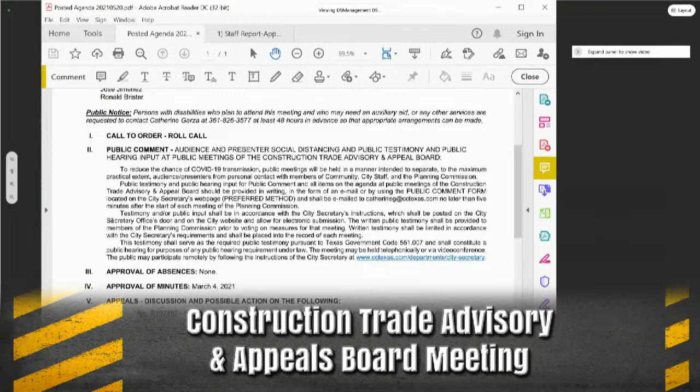Okay, here's the agenda. We have no public comment right now. I'm going to open public comment. If there's nobody, I'm going to close public comment. There's no approval absences. I'm going to open up item number 4, approval of minutes.

Has everyone gotten a chance to review the minutes? If so, I need a first and a second for approval. Mike Wanzer, I make a motion we approve the minutes as written. Gary Camp, I'll second it. All in favor? Aye. Aye. Aye.

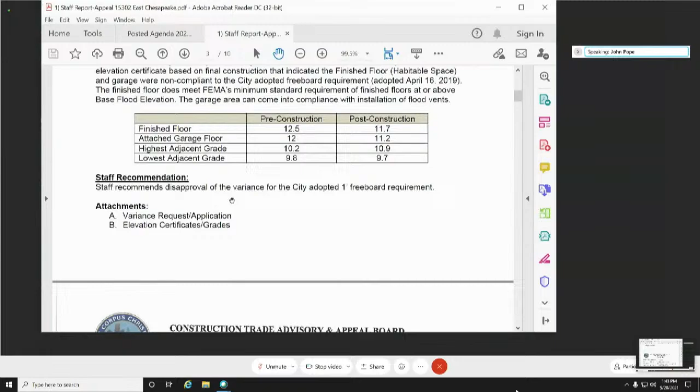And doing all that we could to raise the house. If you deny the ability to obtain a certificate of occupancy, what then? Does that mean we just have to tear down the house, render it unlivable, and rebuild it? I just feel like that's a little extreme.

I think some grace should be given, especially under the circumstances that this exact same builder built one at the exact same time, right across the street, and was granted a variance. So I'm just surprised to hear that the first comment from this committee was to deny it. That's just kind of unfathomable.

Mike Wanzer here. It's not the committee speaking, it's me speaking as a member of the committee, so it's not the whole committee speaking. May I ask why that is your opinion? Sure, you can ask, and I'd be glad to explain.

Mike, you have to wait for this. Oh, you have to wait for. Yeah, let's just wait, let's follow protocol. He asked me a question. He is, but we need to wait until he's done with all his conversations, and then we can close and speak as a group.

Very good, okay, yep. Anything else, John? No, I'm done. Okay, all right. I'm going to go ahead and close public comment and open the discussion to the board members.

So here you guys can bring up questions towards the owner, or you can bring a question towards the building committee, which would be ourselves, or towards Luke Fry or Kathleen. So if you guys have questions or comments, you can speak as a general group.

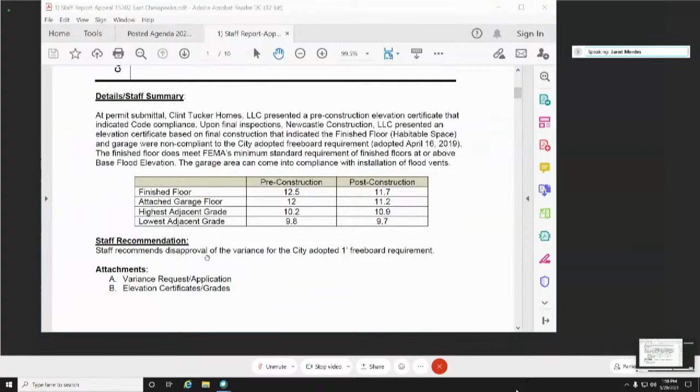Ram, one of the concerns we had - and anyone can go back and listen to the recording of the last meeting - but when you allow a variance that is below a city standard, the message that's sent is, well, what about me? And unfortunately today we're hearing that from the public. Mr. Pope basically says, hey, you gave it to him, so I expect you to give it to me. And in a sense, I didn't think it was going to be a problem because y'all are lenient. And in all honesty, I know I'm speaking out of turn, but I think you should know that Mr. Clint Tucker, we contacted him after we found out about this, and he literally mocked this committee. And so to me, the big problem is these contractors.

I'm not a contractor. I hired out someone who I thought was a professional who proved to not be that. But the contractors are not being held responsible. Why Clint Tucker didn't get a fine for two homes having an inappropriate foundation is beyond me. And why he's still out in our community building five or six homes at this very moment is frightening to me as a consumer.

So we appreciate that comment. This is Mike Wanzer - on that comment, for the same reason that you don't understand why he's still doing that, I don't understand why you don't have him in court instead of in front of us. Why you're not taking civil action against him instead of turning to the citizens of the community for relief.

Well, have you ever gone to court? Do you have $100,000? I don't have $100,000 extra to take him to court, in all honesty. So I'm trying to make it by, I'm trying to deal with what I have, and I don't have the financial means to be able to take that man to court. And if you've had any type of legal action, you can have empathy and understand that sometimes you financially just can't float things like that. And I cannot - we understand your predicament. Thank you. So I'm empathetic, but it doesn't change the fact that it's not in compliance. Thank you, Mike. Thank you.

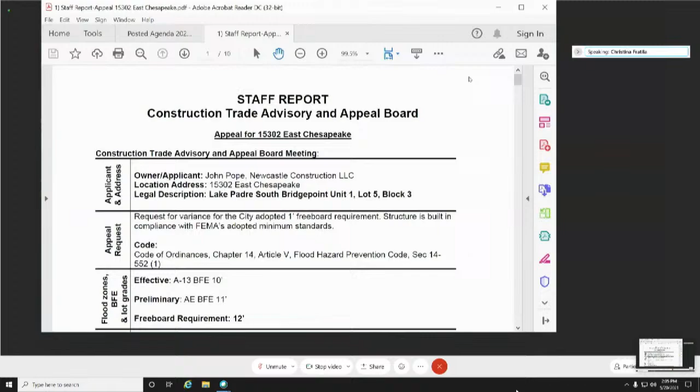Thank you very much for your approval. Yes, ma'am. And if you do choose to open a case against Clint Tucker, please feel free to reach out to me, I'll be happy to give a statement and lots of information because it's a big public concern what he's doing. Yes, ma'am. If you feel like you want to open civil litigation, you're more than welcome to use our findings here. Well, thank you.

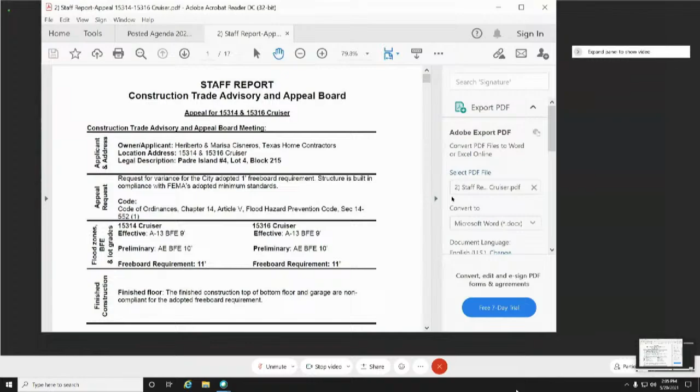Thank you, I'm going to go to the second appeal. I'm gonna go ahead and give me a moment to bring it up, please. Just a moment, no problem. Okay, let me know if you see it. It's on there, we can see it. Okay, great.

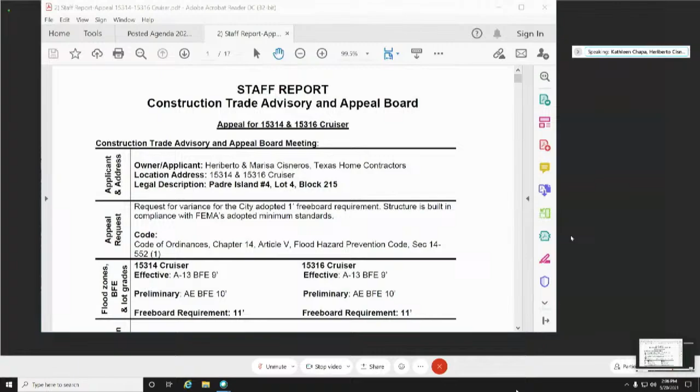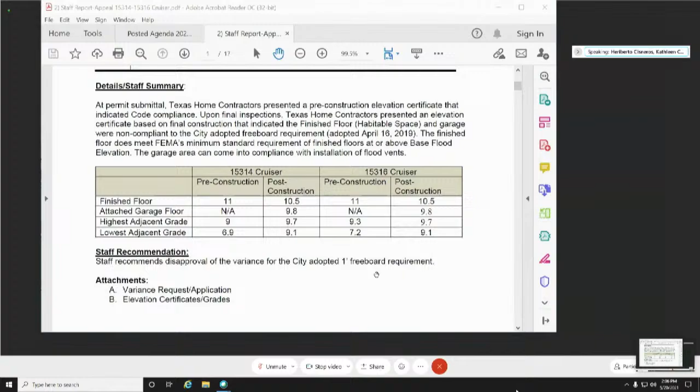Okay, thank you everyone. For the second appeal, we are looking at 15314 and 15316 Cruiser. It is a townhome located at Padre Island number 4, lot 4, block 215. At permit submittal, Texas Home Contractors presented a pre-construction elevation certificate and indicated code compliance. Under final inspections, completed 4/13/21 for both addresses and approved, it indicated that the finished floor was below the city adopted freeboard requirement. 15314 is sitting at 10.5, required pre-construction is 11. 15316 Cruiser is at 10.5, pre-construction at 11. Staff recommendation is disapproval for the variance for the city adopted 1-foot freeboard. Attached, you're going to see the variance request application, the elevation certificates, which include the grades. And I believe we have the representatives online to discuss it.

Yes, we're here. I'm gonna go ahead and open public comment. Yes, sir, can you please state your name? Heriberto Cisneros. Marisa Cisneros. Okay, thank you.

Do you guys have any comments to make? Well, I'm the homeowner of these townhomes on the island, and the property is already, we closed before we got the CO. And when we tried to get my last inspection, we found out we're like 5-7 inches below the elevation certificate from the beginning. I mean, we didn't really know about it. When we poured the concrete, everything was okay from my concrete guy, but honestly, we don't know much about benchmarks and all that.

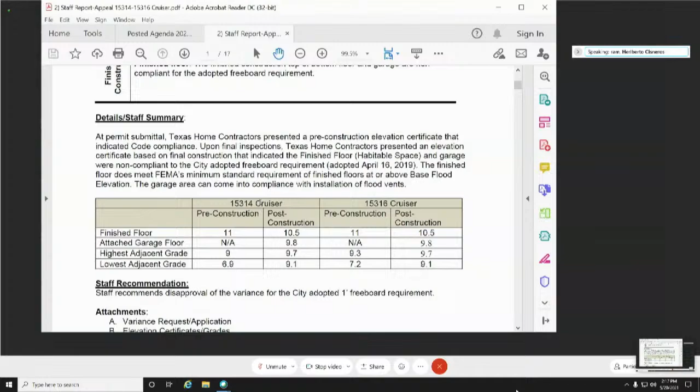Okay, go ahead and close up item 2. We're going to open up item number 3. Thank you very much. Thank you, guys.

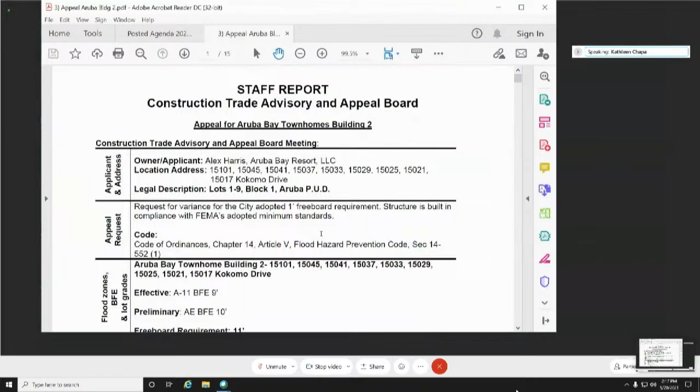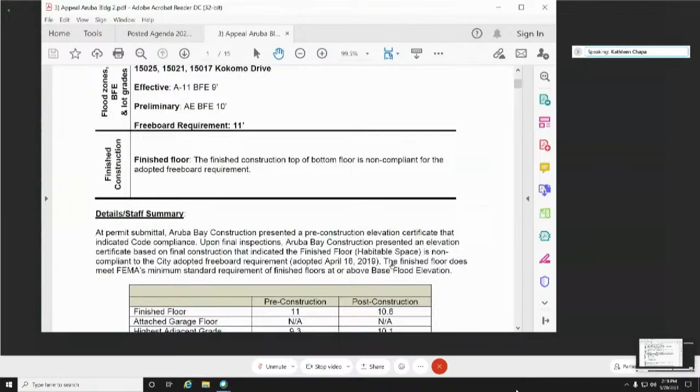Okay, Aruba Bay Townhomes building number 2. There are a few buildings on this site, with 3 different elevations for the site, I believe. And this is the only building that fell a little short. At permit submittal, Aruba Bay Construction presented a pre-construction elevation certificate indicating compliance, with finished floor at 11. Upon final inspections, approved on 4/26/21, it showed 10.6 at finished construction for finished floor, and it does not meet the requirement of 1 foot extra for freeboard that was adopted April 16th of 2019.

It is the staff recommendation for disapproval of the variance due to the city adopted 1-foot freeboard requirement. Below you'll see a variance request application, the elevation certificates with the grades, and we have representatives online today to discuss that. Okay, I'm going to open it up for public comment.

Does the applicant have anything to add? Okay, sorry, I didn't unmute. Good afternoon, this is Alex Harris with the Aruba Bay Resort.

I have with me Craig Kerr and Adriana Carter, our construction team on this property. I hope you can see this — this is a site located out on Padre Island at Aruba and Leeward. The building we're talking about, I've circled, is a 9-unit complex on Kokomo Drive.

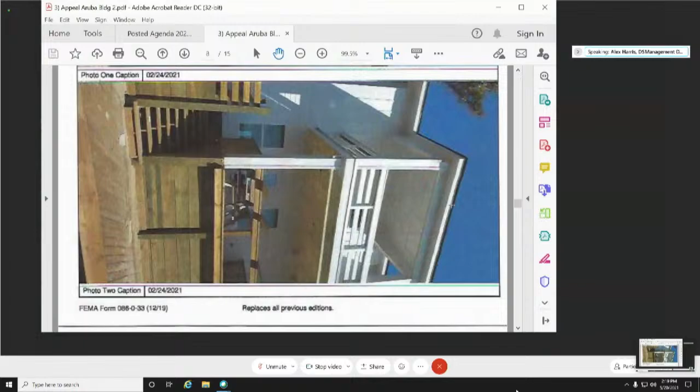When it was built, we thought, from the contractor — and again, we are the contractor, but we do the best we can with the group that we have out there — that it was at the required elevation of 11 feet. Getting ready to finish...

We asked for the final elevation certificates and found out it's 10.6, about 4 inches low. However, this is tied in with a 72-unit project across the street. As was mentioned a minute ago, this site is a little complicated in that it's got 3 different elevations running through it — we have 8, 9, and 10 — and we were working off of a benchmark that we thought would let us appropriately know the elevation on each building.

Each one — we've got buildings 1, 2, 3, and 4 right now. It's our interpretation that this is the only one that has a little bit of an issue. We've built over 500 townhomes on Padre Island and Port Aransas. This is our only one in the last 15 years that did not match up with the proper elevation. We apologize. We wish it hadn't happened.

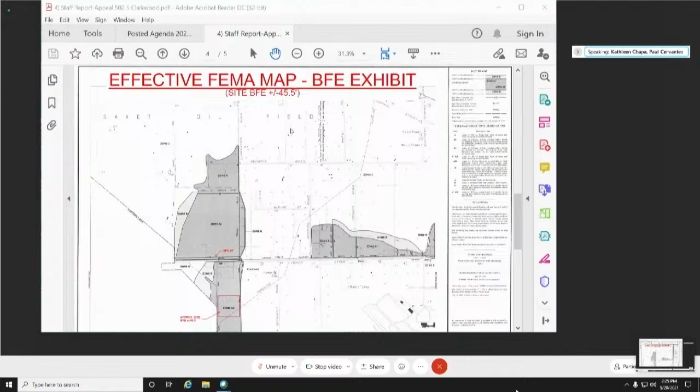We do have a couple of representatives on the line for this site. Thank you, I'm going to go ahead and open it up to the client for comment.

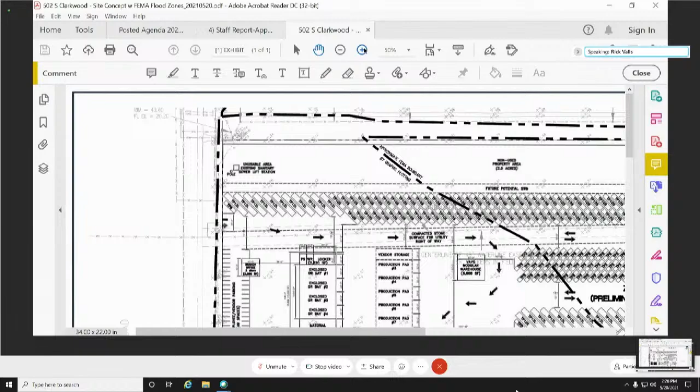Hi, this is Lawrence Valls. Hi Kathleen, and Chairman Munoz and committee. I have with me Rick Valls as well, and I think Michael York is on the line as well. We're asking for your consideration for a variance of the BFE requirement for this 30-acre site. It's a 27-acre project we've been working on for over a year. We've jumped through quite a bit of hoops in zoning and working with the pipelines that are there and being in the AICUZ zone. So we do have some height restrictions we're working through as well. But the project is an interesting one. It's primarily a laydown yard, but it will have a 16,000 square foot pre-engineered metal building requirement.

Our request is related to the effective FEMA maps versus the preliminary FEMA maps that we understand are not yet adopted. We believe the preliminary FEMA maps are more reflective of the actual flood risk in that area. Clarkwood Road is at about a height of 43 feet adjacent to our property, and most of the property is about 41.5 to 42 feet. The BFE from the old maps is listed at 45.5 feet, which would require us to go a foot above that to 46.5 for any habitable structures. We plan to locate them close to the road, which would require about a 5-foot differential from the existing grade, putting us 3 feet above street level. That's going to be very difficult for ingress and egress for us.

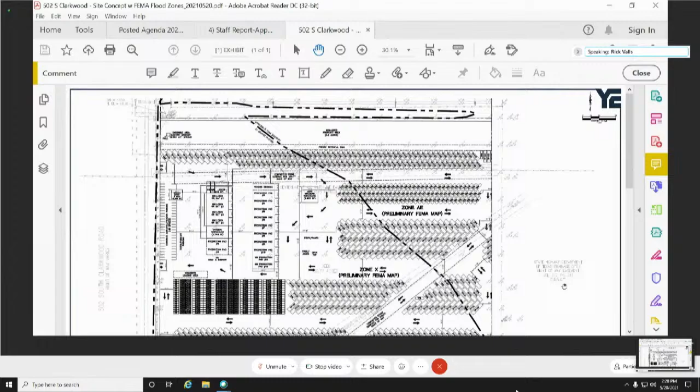So that's why we're asking for your variance there, and we're happy. We tried to include some information with the preliminary maps, but we think those preliminary maps are more reflective of the flood risk, and we're asking that you recognize those for this project. We're happy to answer any questions, and we appreciate your consideration.

This is Rick Valls. The only thing I'd add is that the warehouse in question, the offices will be separate from the warehouse. That warehouse will run 40-foot units through it for a final check that go off to job sites in the region. But the actual offices will be their own product and stacked on a flat site closer to Clarkwood. So they will be mobile.

And just to expand on that a little bit, where Rick was going is that this is going to be a storage site for Mobile Minis. Those are trailer mounted units, long wheelbases, and this will be a make-ready site. The pre-engineered building will be a make-ready site for those, and having to transition that much of a difference in height will create some challenges for those modular units, to the point that it'll likely jeopardize the viability of the project at this location.

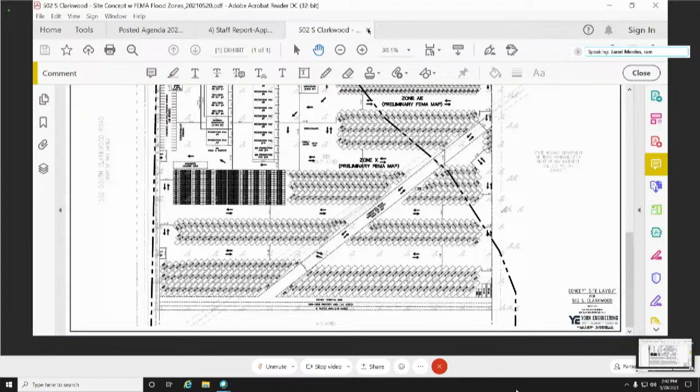So what is the likelihood, because I'm very ignorant to how FEMA does map construction and how they approve it, and I know it takes a long time, but what's the likelihood of FEMA changing a preliminary map in this area? Does anybody know how that would work, if it would at all?

I mean, it's highly unlikely they're going to change it. There would have to be some storm event that required them to come out here and reinvestigate and redo the study. But on stuff like this, in the past, when we've had multiple building code issues where we're going to go to the next one, we put the liability on the owner at that point. If it never gets adopted, they don't get a CO. So there's a little bit of shifting of liability that does occur here.

Well, from reading FEMA requirements, basically what FEMA is trying to do, at the end of the day, is so people don't get hurt, but also so they don't have to pay. They want to make sure tax dollars are not just burnt. So if someone occupies this facility and it is damaged and they want to go to FEMA for damages, that's kind of what FEMA's main driver has been — insurance costs, other than safety and public concern.

So, given this facility, it's mostly storage units and no one's living here. The structures are all metal buildings. I don't really know what damage would occur, and if that's even applicable, because that's what FEMA is concerned about mostly.